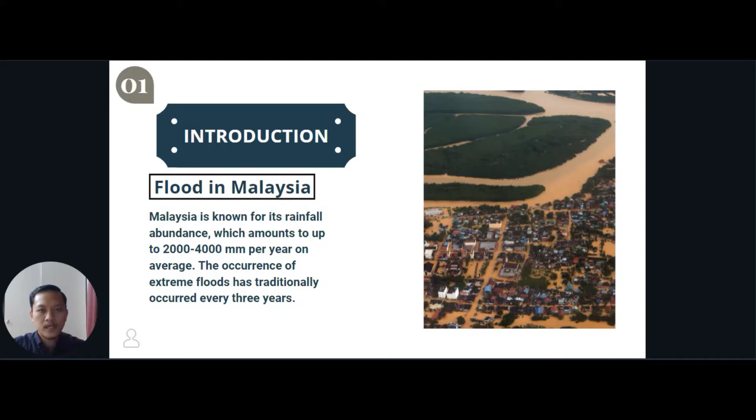Moving on, HEC-RAS. HEC-RAS is an abbreviation of Hydrologic Engineering Center River Analysis System. So, for your information, there are lots of hydrodynamic models used for dam breach study, such as HEC-RAS, HEC-HMS, NWS-FLDWAV, or NWS-DWOPER model. So for this study, we will be using HEC-RAS for our breach model, and we will be using input data from a digital elevation model, or DEM in short, and then the estimated breach parameters gained from the regression equation.

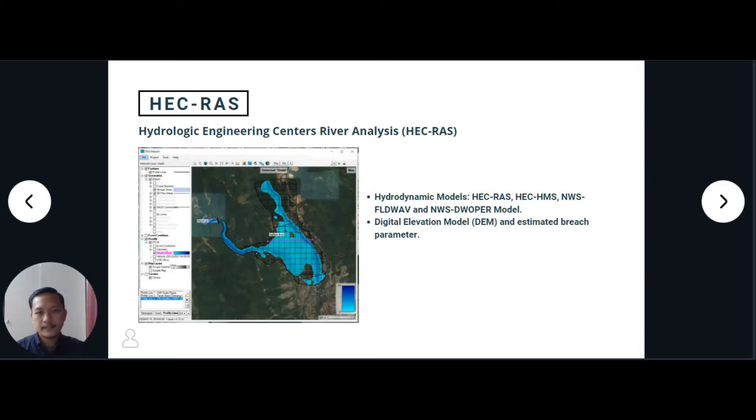So next, regression equation. For this study, we will be focusing on 3 main regression equations, which are Froehlich 1995a, Froehlich 2008, and lastly Von Thun and Gillette 1990. These 3 regression equations will be used to calculate the breach dimensions, which are the breach width, the breach failure time, the bottom breach width, and lastly the breach side slope. All 4 of these breach dimensions will be used as input of our breach plan data in the HEC-RAS flood simulation. As you can see on the bottom of this slide, this is the summarized table for our breach dimensions obtained from the regression equations.

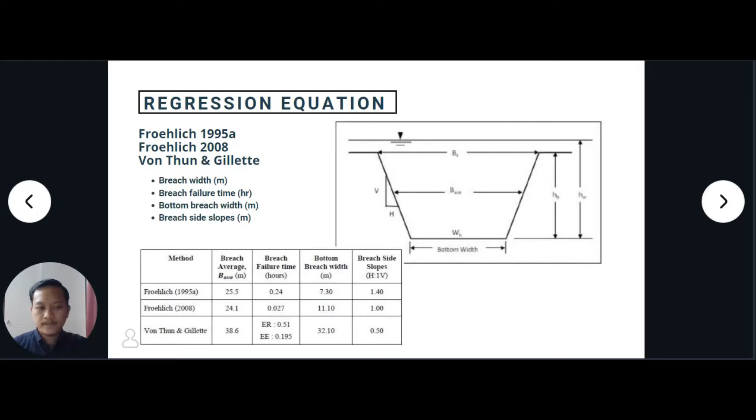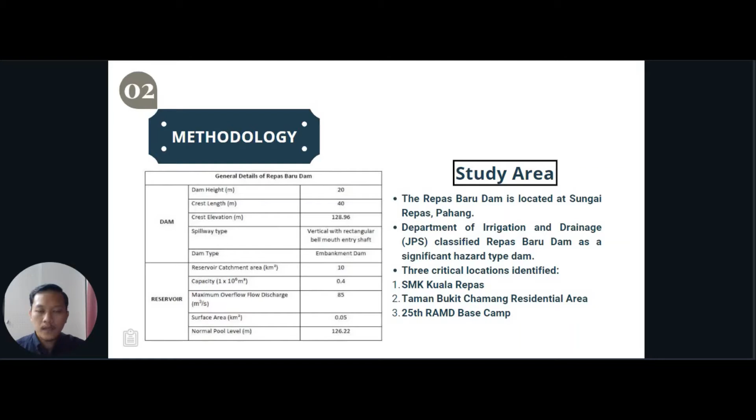Second topic, methodology, study area. Our study area is Repas Baru Dam, located at Sungai Repas in Pahang State. Repas Baru Dam is considered a large dam and has a significant hazard classification by the Department of Irrigation and Drainage, or Jabatan Pengairan dan Saliran. Commissioned in 1963, Repas Baru Dam is located 610 meters downstream of Old Repas Dam and acts as a silt retention. As you can see in the slide on the left side, these are the general details of Repas Baru Dam, which we will use to calculate the breach dimensions for our input in the breach plan data.

Moving on to the estimated breach parameters, as you can see in the slide, there are 4 breach plan data. First is from Froehlich 1995a, second is from Froehlich 2008, third is from Von Thun and Gillette for erosion resistant, and lastly from Von Thun and Gillette for easily eroded. There are 2 distinct characteristics of the breach parameters. Firstly, both Froehlich regression equations have a steeper side slope compared to Von Thun and Gillette. Froehlich 1995a has a breach side slope of 1.4, while Froehlich 2008 has a breach side slope of 1.0, while both Von Thun and Gillette have a side slope of 0.5.

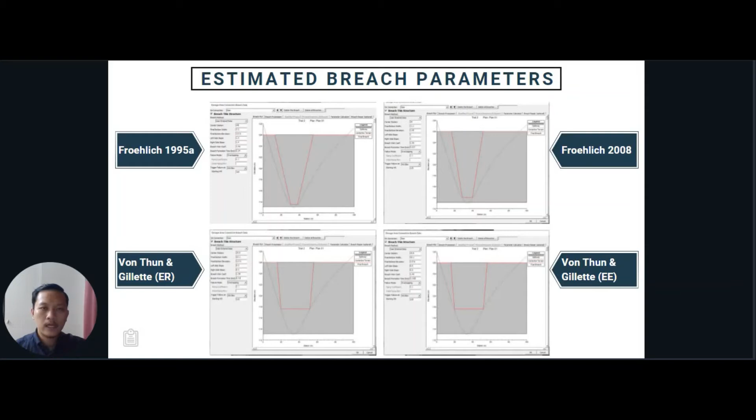The next distinct characteristic is that the Von Thun and Gillette regression equation has a wider bottom breach width compared to the Froehlich regression equation. Model setup. So first we will extract DEM data from our data collection, and we will portray the data in HEC-RAS by using RAS Mapper.

As you can see in the right part of our slide, we have the 2D satellite image of our study area, and below it is the 2D geometry model of our study area. Next, we will draw a 2D flow area polygon for our reservoir and our surface area, or we call it the downstream area that will be affected by the flood.

Then we put the input boundary condition and define the dam structure and breach data plan, and lastly we will do the simulation according to the breach data plan.

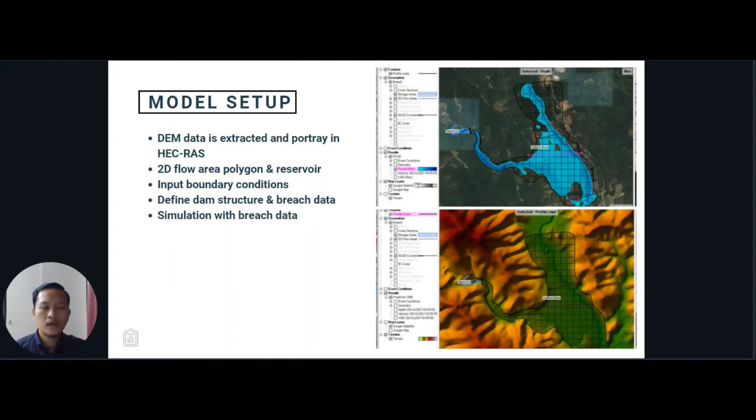Next, result and discussion. The breach flow for an overtopping failure: as you can see in the graph, the peak discharge for an overtopping failure is between 1637 cubic meters per second and 1686 cubic meters per second. It is found that for Von Thun and Gillette, for both situations, easily eroded and erosion resistant, the peak discharge is the same. It was also determined that Froehlich 1995 and Froehlich 2008 have a difference in peak flow discharge of 85 cubic meters per second. The maximum peak discharge is recorded around 5 hours into the simulation.

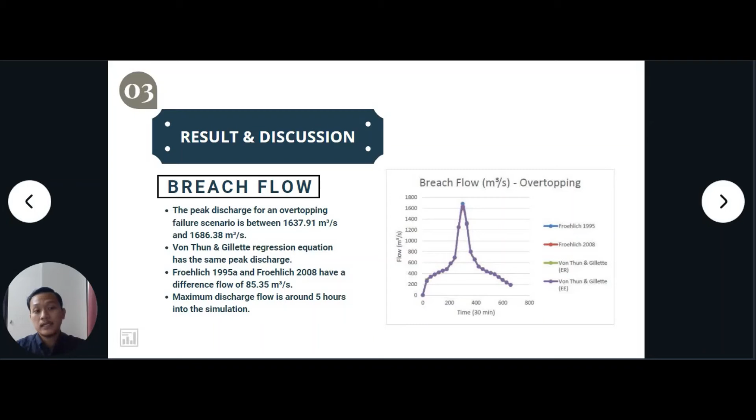Elevation. So the max elevation for an overtopping failure at Repas Baru Dam is around 127 meters for all regression equations. However, as you can see from the graph of elevation, there is quite a significant difference between the regression equations of Froehlich and Von Thun and Gillette. As you saw before, for the breach flow we have approximately the same values, not far from each other. However, the elevation is not the same.

As you can see, in the first 30 minutes, Von Thun and Gillette for erosion resistant has the highest elevation of 121.57 meters, while Von Thun and Gillette for easily eroded had a lower elevation of 120.68 meters. Meanwhile, both Froehlich 1995 and 2008 had around the same elevation of 119 meters in the same period of 30 minutes. The time for maximum elevation is the same, 300 minutes or 5 hours into the simulation.

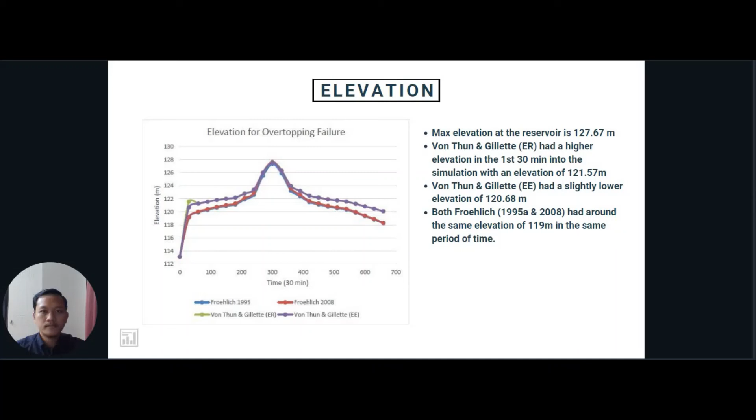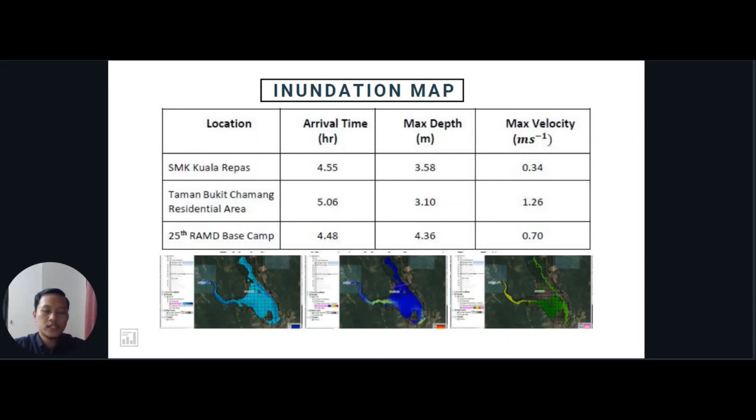As you can see on the bottom part, there are three images. The first image on the left, the light blue part, is the depth of our simulation, in the middle is the velocity that hits the downstream area, and lastly on the right side is the water surface elevation for the downstream area upon the dam breach simulation.

Finally, conclusion and recommendation. Conclusion: evacuation plans for SMK Kuala Repas and 25th RAMD base camp should be prioritized first, as they have a shorter response time compared to residents in Taman Bukit Chamang. However, residents in Taman Bukit Chamang are exposed to the danger of a probable maximum velocity flood wave of 1.26 meters per second, as flood debris may be swept into their area and endanger residents' lives.

Government and local bodies are required to have accurate forecasting of inundation level and arrival time of the flood wave in order to build a reliable and adequate emergency response and action, so as to reduce or minimize the damage from a dam breach.

Recommendation: it is recommended that the collection of input data parameters and site location be improved further. In this study, the actual size and shape of the reservoir and dam are not available. As I looked through RAS Mapper and Google Earth Pro, the image is not clear. It would be very helpful if in the future the user can obtain data on how large the reservoir is and the shape of the reservoir and dam; it may give a better simulation result than in this study. Okay, so I think that's all from me.